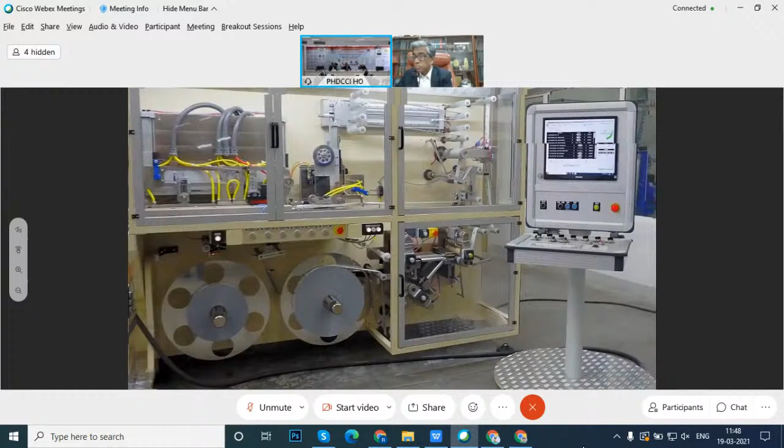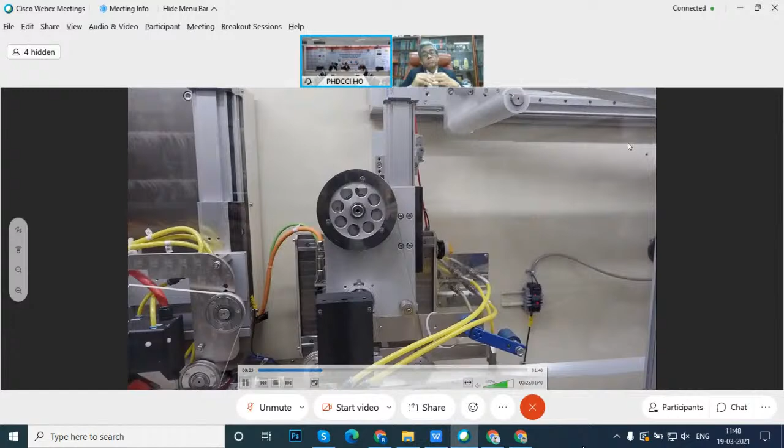Okay, video of the machine, maybe first to show the presentation and then. Put on the presentation also. You want to see the presentation.

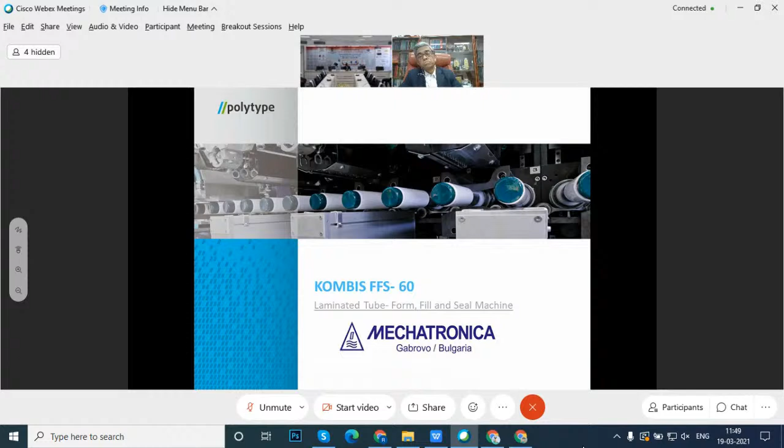Yes, presentation please. First presentation. Okay, good, please work.

So first, just a brief presentation of the companies which I'm presenting. In fact, I'm shareholder and CEO of a company called Mechatronica. Mechatronica is part of a company called Polytype, which is this company. Polytype is a leading equipment manufacturer from Switzerland, as you see in this presentation. They're making equipment for the packaging industry - food, drink, cosmetics, and pharmaceutical - and they have experience for approximately 60 years.

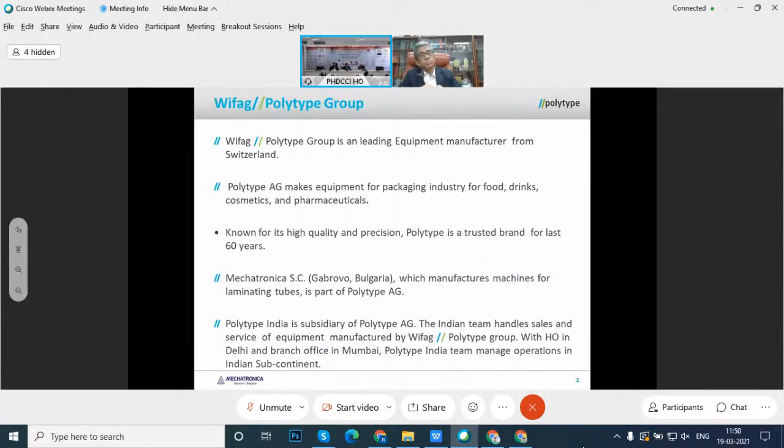Okay, this is a picture of the company and the team working, approximately 80 people working there. The company has a long history, about 60 years, and was always a company for high technology, for new technologies. Many new developments were made through the years.

And to make a machine, we started 23 years ago, but before we had technologies that were part of tube making by conduction, especially, and the knowledge of this technology was already helpful. So this is one of the machines, in fact the first fully developed model, which has already sold around 10 pieces around the world. This is the Kombis trade name, FFS 60. And this machine we are marketing as a machine for short run jobs.

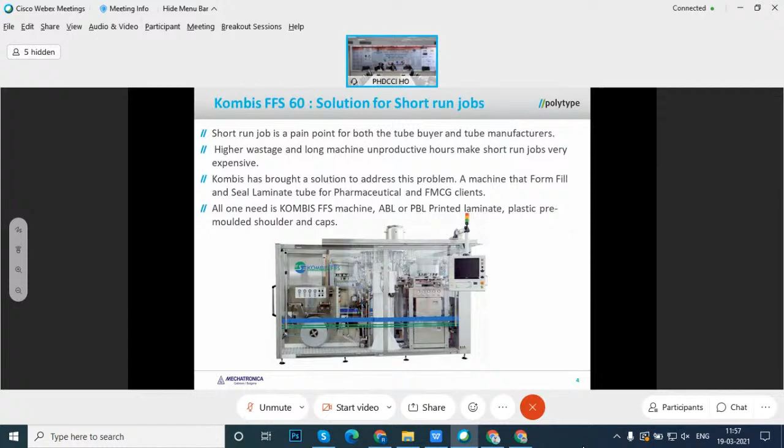First process is to form the body. You take a flat laminate, wrap it around the mandrel, then you do seaming, and then you do cutting. This is the body making - this is the only process which exists in normal production, nothing new here.

Then the next one is putting shoulders. In this technology, we are using a process with so-called pre-molded shoulders. There are two types of technologies for making tubes - you may even say three. One technology is where shoulders come ready-made on injection molding machines, and the tube making machine is just an assembling machine. Another technology is in two versions, but in both, the shoulders are made online - one is with compression molding, which is more efficient in many ways, and another is normal injection molding.

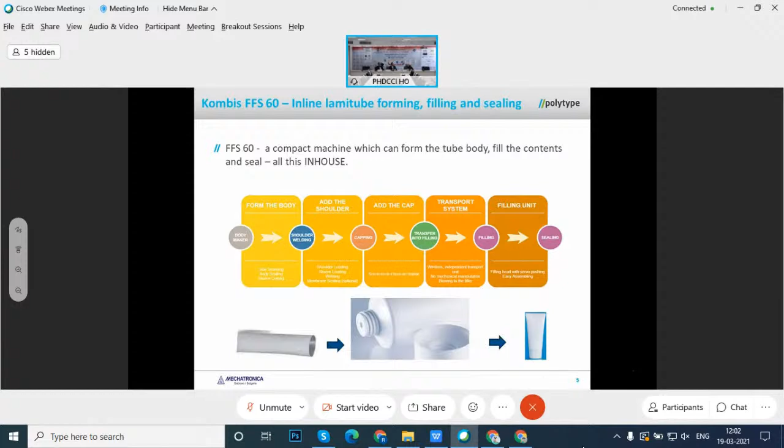Here's the process in more detail, same as what I already said: body making, unwinding, side seaming, sleeve cutting, transfer to heading with pre-molded shoulders, body loading, shoulder welding, tube capping, then transfer to the filling table, filling unit. Then on filling we have orientation, and we may avoid or skip orientation because in most cases we know the position of the tube - here I'm representing FFS 60 machine.

In this machine, in fact, we don't have orientation, but we are also going a little bit higher speed, where we are losing a little bit of orientation. So orientation sometimes is necessary, and you need it because of the physics - you want this face of the tube to be on one side only.

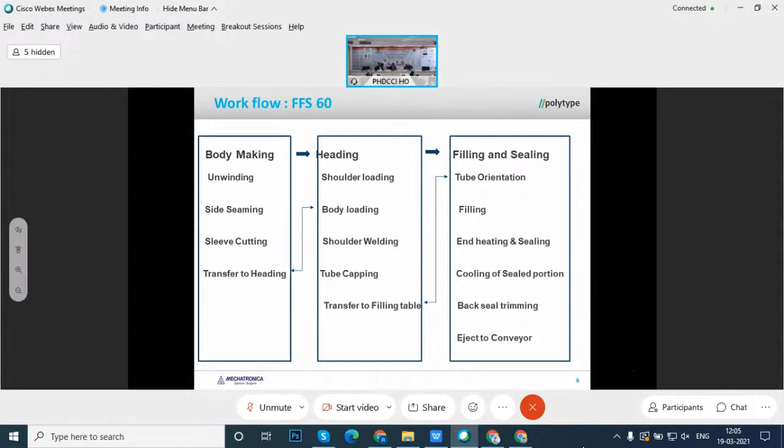Okay, so the next point here is contamination. This is, as I said, extremely critical for the pharmaceutical industry, but also in some other areas it's of course also important.

As you see here, from the time when you start making the tube to the moment when you fill it, it goes through different stages, and also usually two different places when we use standard technology. First the tube is manufactured somewhere, then it's packed usually in cartons. Those cartons can also create some contamination because it's not perfectly clean. Sometimes they are wrapped in polyethylene, but this process takes time, so there is always a risk of some contamination from the cartons.

Then, especially this tubular material, which is a plastic-based material, is very sensitive to static energy, because there is no conductive material inside. In ABL tubes, you have this aluminum layer which distributes these charges somehow, but in plastic especially this is not possible. Therefore in tube making, many times you do static discharging, but you can only do this from outside.

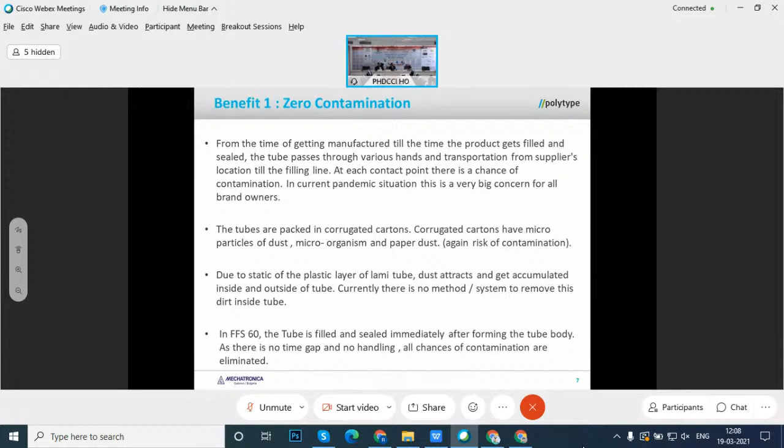Here, this is not a problem because, even though of course there is static charge, filling is done just 2-3 seconds after tube making, and usually the machine is in a clean environment, so there is usually no dust. So this problem does not exist. This is a very, very big advantage, and guys in the pharmaceutical business like this very much. Of course, in other cases it's also good.

Then the next advantage, which is more important here for oral care products, is cost. In the pharmaceutical business, cost is usually not a big issue, and the medicine is usually expensive enough. But in oral care, cost is a big issue. So the main advantage of using FFS technology is in thickness. And why can we use thin material? I told you that the main problem, which we are also solving, is transferability.

If you use thin material, tubes are very soft. And transferring these soft tubes from the tube making machine until they go into the holder on the filling machine is very difficult, and in particular with material below a certain level, it's practically impossible. So on this machine, we can make

very thin tubes. Just to give you an example, our standard laminate thickness at the moment, which is used for ABL, is something like 220 microns, about 1/5 of a millimeter. This machine we were testing with 120. This is almost half of this material, and it works without any problem. So you may save a lot of material. Half of the thickness means half of the cost. Because usually foil is the most expensive component of the tube.

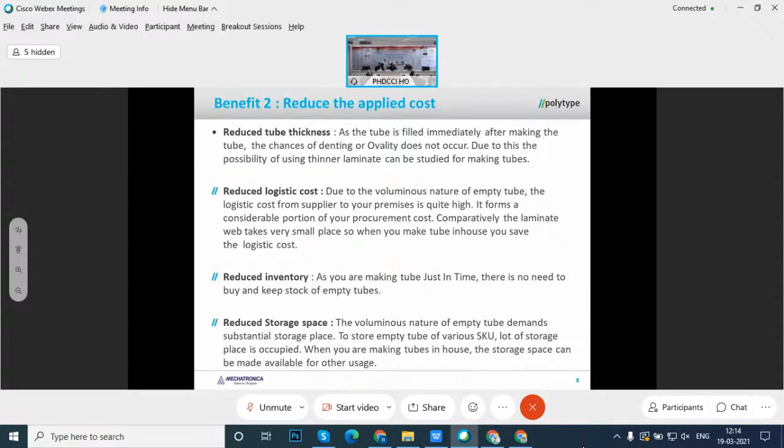Storage space is also very clear, because you don't really need storage, or at least you only need storage for the foil, which by volume is maybe only 1/10 of the volume tubes take. Very easy to store foil.

So this is an advantage which I want to discuss again. Another problem: as I said in the beginning, more and more brand owners are targeting small runs. But to make short runs you still need to produce these tubes, and tube making is a process which requires changing settings. When you start making these tubes, you always have some scrap until you adjust the machine, and then it goes to the filler, and then again you do some adjustment. So during this process, when you do short runs, you always have a certain level of scrap.

Using this, you significantly reduce this scrap because you skip some of the process. Of course, I cannot say there is no scrap at all, but the reduction is quite significant for short run jobs. And lead time in some cases is quite a big problem. When you need to order a small number of tubes for a new product, manufacturers, if they accept your order at all, because most of the time they are not even ready to accept it, put it at the end of the priority list. So they usually make those tubes when they get some time for doing this. It could be a very long time.

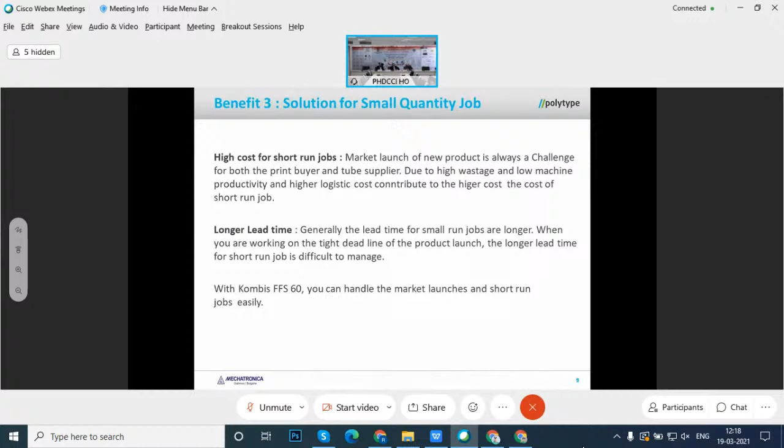So this is a big advantage of the technology in this way. Hopefully, if you can digitally print it, even this is not a must. Okay. And carbon footprint, I already talked about this. The main reason is that you use thin laminate. But also, as I mentioned, you may do a combination of tube and shoulder in one piece, and that also helps to save. Really thin material is something you can run only on this, something like 120 microns. And also during transportation you spend less fuel, so it also helps a little bit to save footprint.

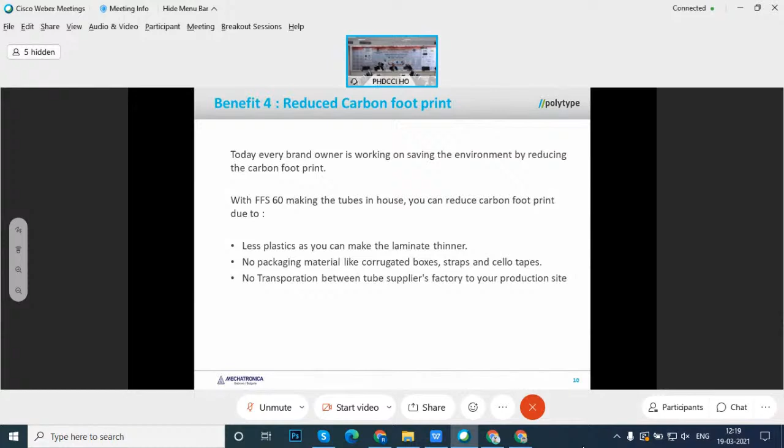Here is just brief data for this machine. For type, as you see, ABL and PBL. For thickness, as I said, ABL 120 to 400. PBL, so far we never did less than 220. I'm not sure it cannot be done, but we never tested because we didn't find such a material so far. Most probably it will be possible. But ABL we tested and it runs very well at 120. Speed for PBL has some difference. This is related to tube making: the difference is because of how you seal the tube. You first heat the plastic and press it, and then you need to cool it down.

When you heat it, if you provide a high thermal gradient, so it means your heating agent, if this is air or maybe induction, you may heat this plastic to 200 degrees. Usually more than 300 is dangerous because there are structural changes in the plastic, but at least you may hit 200 degrees. So if you take from 20, room temperature, to 200, you have a high gradient. So heating transfers relatively fast.

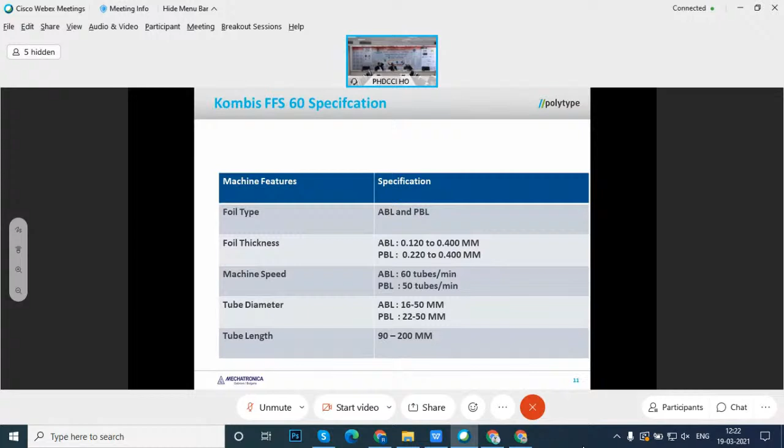Diameter range again is a challenge. We also have one machine that is doing even 10 millimeter tube. But this 10 millimeter tube is not very efficient because it's much more material, like shoulder, cap, whatever, and inside there are 2, 3, 5 milliliters of product. So this tube is more packaging material than product inside. But it could be made. And then length 90 to 200 also could be reduced a bit. And that's it.

Thank you, and we'd like to show the video now. Okay, yes, it's good to see the video because you will get more information about the machine.

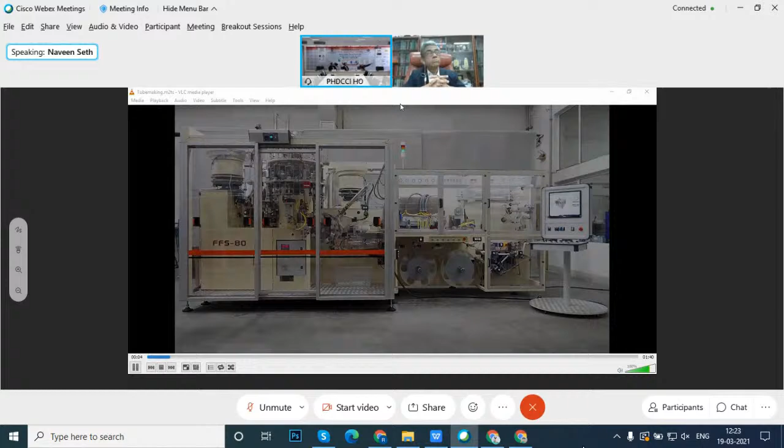This machine which is on the video is for our customer in Japan. It's not FFS 60, it's FFS 80, so this is 80 per minute. This company from the start is using only FFS technology for tube production. And they produce toothpaste, they produce some cream. I don't know whether you can hear, you probably can hear. This video is kind of an initial video.

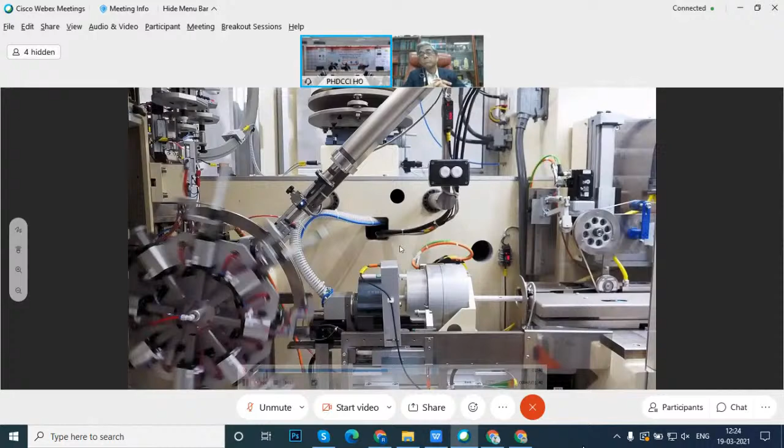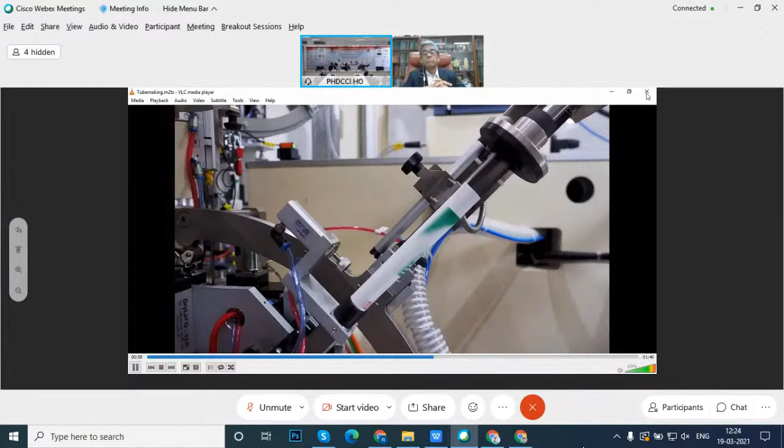So here is body making, cutting of this body, it's a rotary cutter, then it's transferring to the intermediate table, because it also needs orientation. Then it's transferred to the tube making part. Those are shoulders, body shoulders. We wash shoulders before washing the body, then wash the body, then we do sealing of the shoulders, and then caps are coming. In this case, those are conical caps, simple caps. On this table, we also can do orientation of the cap if needed. And this is the capping, and then this is transferring to the filling process.

The filling machine, as I said, is not very much different from standard filling. Most important is really this moment of transfer. As you have seen, the tube is pulled from the mandrel, and immediately the head of the tube goes into the holder before it leaves the mandrel on which it was made. So there is not even a fraction of a second where the tube is free. It's really very important for thin material. If you have thick material, a stable tube, you may use many ways to transfer, but here you cannot. Okay, so thank you. Thank you.

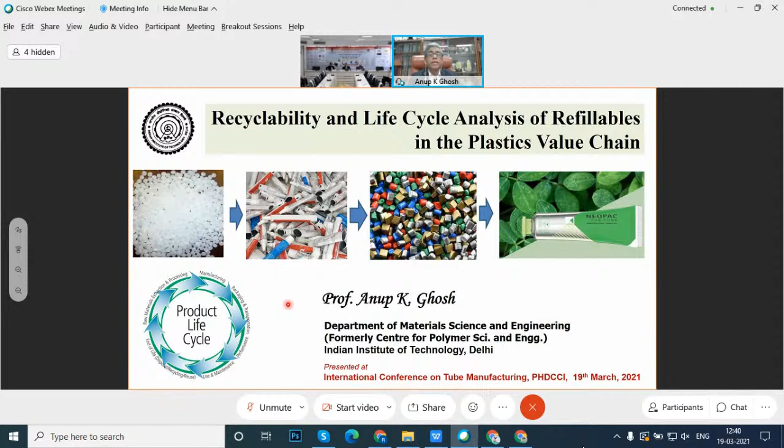Before I go into my presentation, I have to talk about my department at IIT Delhi. It is one of the established centers in polymer science and engineering nationwide, and it is number 1 in the nation and also globally. But very recently, we have broadened all our activities into a new material science and engineering department, which takes care of all different aspects of materials engineering and material sciences, covering polymers, metals, functional materials, nanomaterials and electronic materials.

And we also have a Center of Excellence established under the Ministry of Chemical and Fertilizer, Government of India, under Advanced Polymeric Materials. And by broadening into a new department, as you can see the inaugural program, the students and our director and all of the faculty involved, we also have started new undergraduate and master's programs in materials engineering, which are already taking the top ranking students among all other institutes and other IITs.

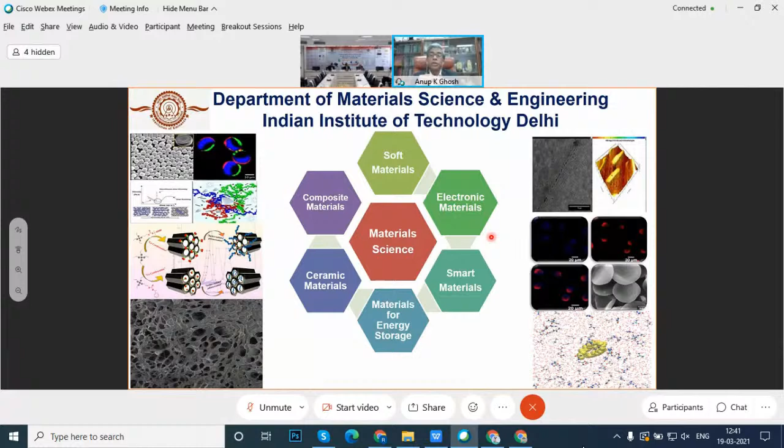What we are covering are all materials starting from, as I said, soft materials, electronic materials, smart materials, materials for energy, ceramic materials, and composite materials, and that covers the total material science. And you can see different structures and properties and processing that we develop. I just wanted to give you a little bit of preview of our department, and then I move on to my talk.

This recycling and the environmental concern is becoming so important, and in every conference, every forum under the United Nations and in India, in many ways we are now talking about sustainability and environmental programs. Very recently, the New Plastics Economy Global Commitment has been made under the Ellen MacArthur Foundation, in collaboration with UN Environment, and they have decided to go for a common vision and targets to address plastic waste and pollution.

A number of signatories worldwide took part in this. As you can see, close to 200 businesses that are part of the plastic packaging value chain, representing 20% of all plastics packaging used globally, have signed up. 16 governments from 5 continents signed up. 26 financial institutions with investors have signed up for this. Leading institutions like the World Economic Forum and consumers have all come together.

And interestingly, more than 50 academics, universities, and other educational research organizations, which include the MIT Environmental Solutions Initiative, Michigan State University, University College London, have all come together to address many issues of concern whenever we are talking about tube manufacturing and other packaging manufacturing.

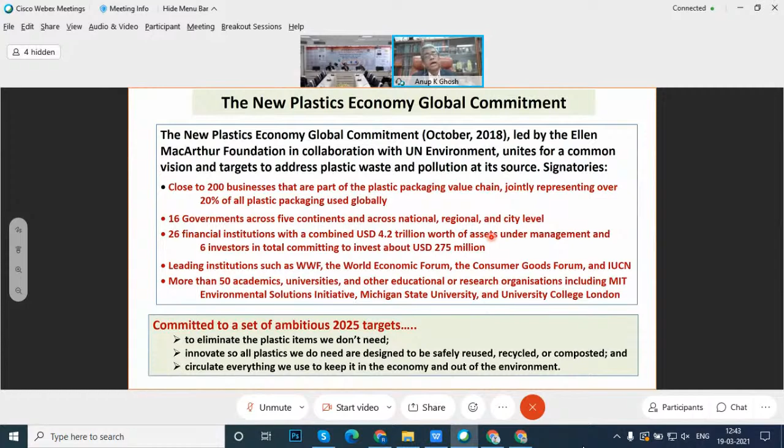We need to look into this, and they have set ambitious 2025 targets: that we eliminate plastic items we do not need, or we innovate. All plastics that we need are designed for reuse, recycling, or compostability. And we circulate everything we use to keep it in our economy and out of the environment. So we have to now go for a circular economy, and we have to circulate.

With this, my background presentation is where we can think of circular economy solutions with the scope of recycling methods across the plastic value chain for any packaging, whether it's a tube, flexible packaging, or a container. And leakage of plastic waste to the environment is the least desirable.

So how do we analyze that? Mostly we need to make a hierarchy of plastic waste management. We need to categorize all products as single-family or multi-family material, and that has to be done based on the extent of recyclability.

We need to understand that everything cannot be recyclable, and whatever is recyclable also has a degree of recyclability, and this degree of recyclability depends on the material, and also how many layers and how they are laminated. Is it laminated with a single-family material or a multi-family material? And you have to quantify how difficult it is to recycle by mechanical and energy impact. That's what we are doing with life cycle analysis, and that's what I have mentioned.

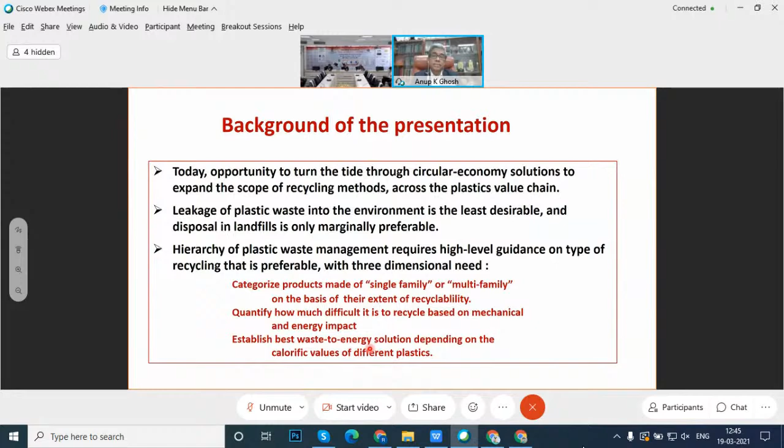And we need to establish the best waste-to-energy solution depending on the calorific value of the different plastics or materials that we are using. So, no need to say that plastic recycling is the need of the hour for sustainable development. By 2050, we will need 35% more food, 50% more energy, and 40% more water.

How do we manage that? When we try to manage that, what kind of material is required? That's why we say waste management and materials management have to be connected in order to solve it. We cannot be biased. We cannot just eliminate one for the other. We need to evaluate; every material has its place.

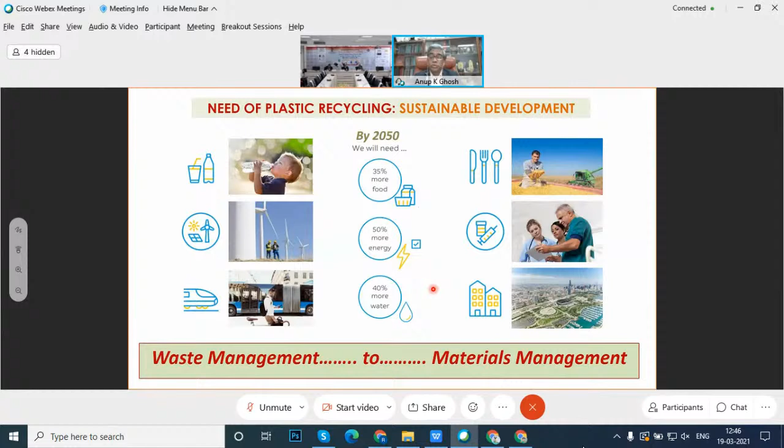This is not only waste management; we have to do resource management and material management, and how much from the waste we can bring back to the actual virgin material, or as a replacement of virgin material, is becoming the challenge, and that is the United Nations directive that we have to follow. And what are the benefits of that? Let's have a look at it.

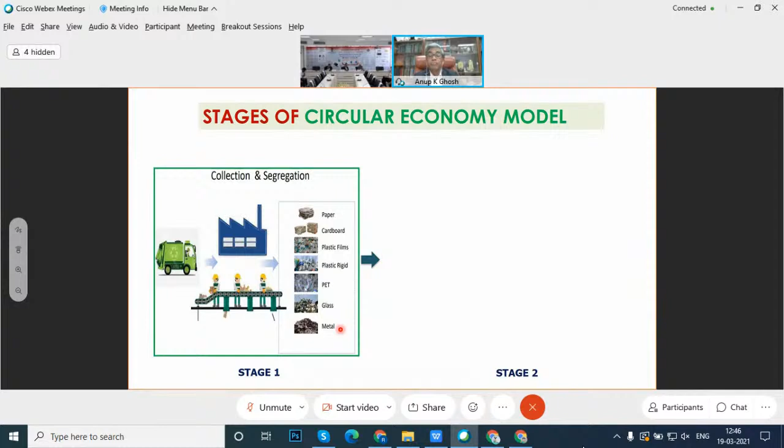So for the circular economy we have two stages. First stage, we have collection and segregation, and when we segregate, we have all different kinds of material: metal, glass, polyester, rigid plastic, plastic films, cardboard, paper, etc. We need to segregate, and then we have a value chain. There can be a rigid plastic value chain, there can be a flexible plastic value chain,

and that has to be connected together so that finally we reach a product, in what we call a cradle-to-cradle system. I've written that collection and segregation is a challenge: how do we segregate this material, grind it, and get plastic granules. This is where we have to reach. We have to do a lot of research and a lot of technology development.

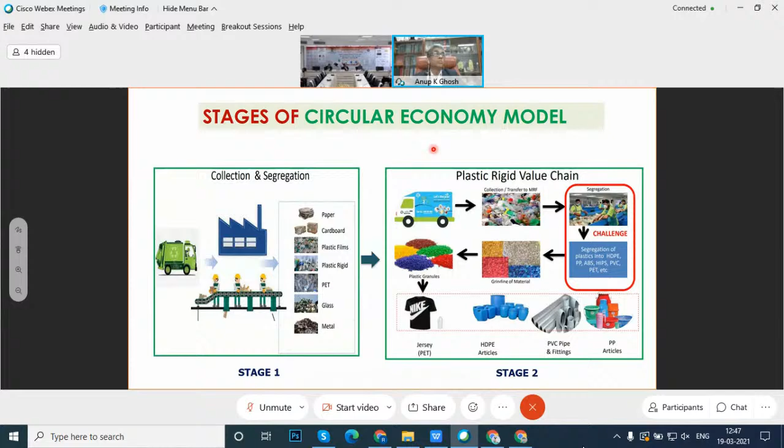Not only do we have to develop packaging products, we have to see that after use these packages can lead to very valuable plastic granules, called post-consumer resins, which can be converted back into the actual product or go back as a replacement of virgin material. If we can do that, we'll have the successful circular economy model that we want. I will go very quickly with this.

Where is the problem? Smaller plastic is a big problem. We are talking about the lamy tube here. The caps will be a problem. The container caps are a problem. Smaller items are now being considered single-use plastic products, which has come as a United Nations regulation. Our country is now putting that regulation in place. Within a few months, early next year, this will be in place. We have to look into it.

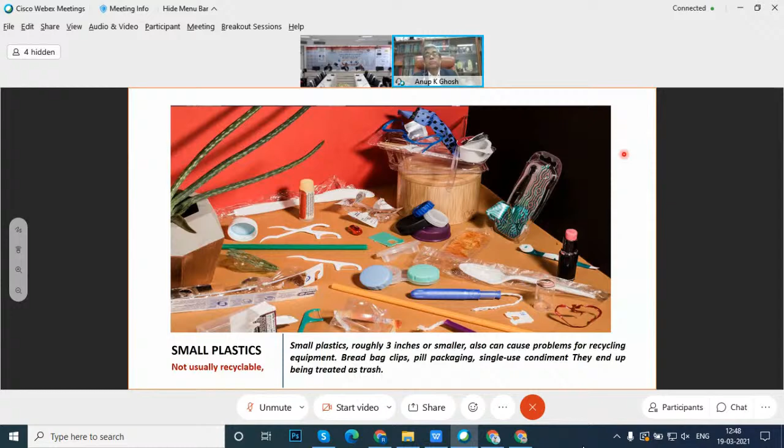If it goes to flexible packaging, it's recyclable, but proper collection, sorting, and processing are needed. And if it is multi-layer, then it's a big problem, and we have to see that. Many packages have different layers, with plastics as well as non-plastics, as in the lami tube. Also, because of the barrier properties, we are bringing in other materials or liners with aluminum or other materials.

Until and unless there is a separation of layers, we will not be able to capture this, what I can say, that PCR. So we have to look into that.

Bags, as we know, are a problem, but it is micron thickness dependent. I will show you how, from micron thickness dependency, we can add value to the environmental concern by bringing back this material if we are using our technology properly. Obviously, it requires proper collection and sorting, and then they can be recycled back, and there are lots of recyclers actually working to put it back.

Even the beverage bottle or the tubes are recyclable, but we have to be sure to remove which products are removable, or which other materials need to be separated even among plastic material, so that the container is removed away with the labels, and recyclable or non-recyclable materials are separately brought in. So some areas of segregation become very, very important, and we have to make a lot of effort in this area.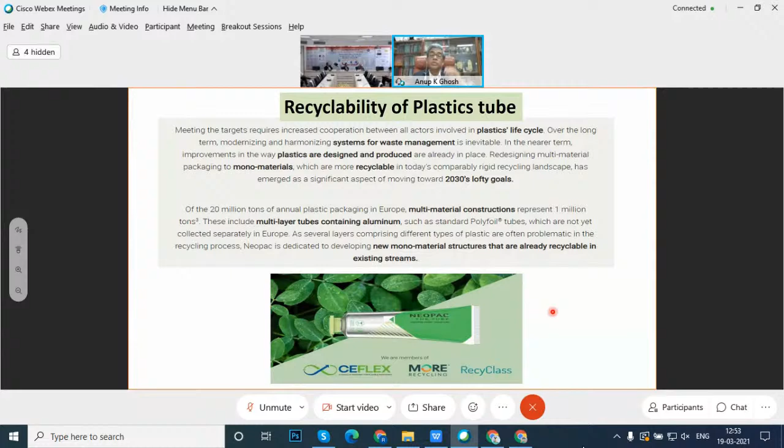So we have multi-material plastic tubes always. In Europe, 20 million tons of annual plastic packaging is happening, maybe even more, because the statistics are changing. Out of these, 1 million tons are multi-material combinations, so you can see that about 5% is a multi-material combination, which cannot be recycled easily. The recycling is also difficult when there are different types of plastics, as well as non-plastic material present.

So can we take care of that 5% of foreign materials, so that the recycling process is not disrupted? We have to redesign the material with the solution of monomaterials, which I was saying. Many companies, I'll show you some, are actually looking for the solution, and everybody is coming up with a new solution.

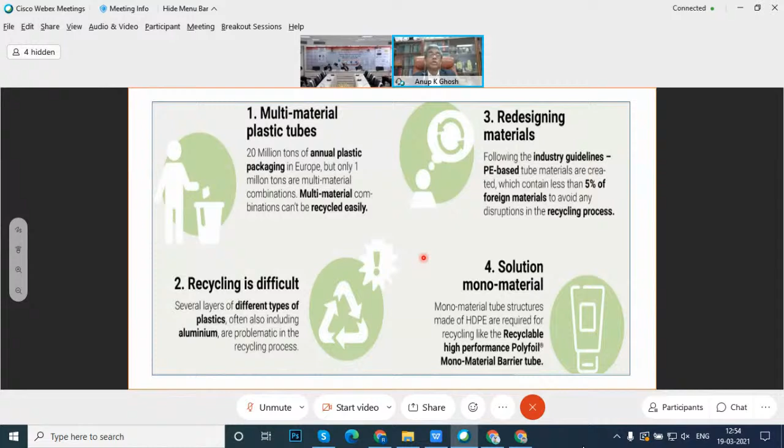So what is the waste hierarchy? We have from most preferable to least preferable. We do not want disposal. We do not want our packaging material, laminate tubes and flexible tubes and all that to go into disposal, because it will harm the environment, and we are also losing the value.

If we go up to the most preferable way in the waste hierarchy, we would like to see energy recovery, recycling, and reuse. The reuse concept should come in this waste hierarchy, and that can determine the recyclability. We should go for reduction wherever needed.

My previous speaker also mentioned that they always started avoiding extra paper carton and other extra packaging. Why should we go for extra packaging? Why does toothpaste have to be put into another rectangular or square cross-section paper box? Why can't it go only as a tube into the market? There should be prevention of using such material. As we move upwards, we are actually reducing the waste as much as possible.

So the recyclability has to be defined. Recyclability is defined in such a way that plastic should be made so that it can be collected. It should have visibility, collectability, and value in it for collectivity. If it doesn't have value, it is not collected. Anything is not collected if it doesn't have a value, and this collectability defines the recyclability.

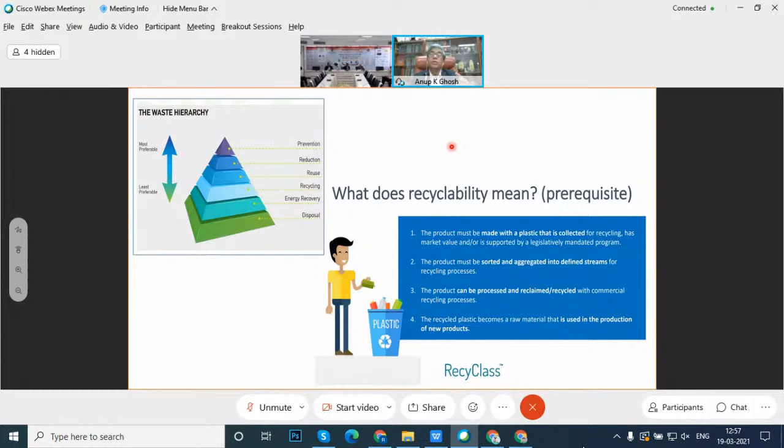This is a RecyClass, defined by France, which has now been considered by many as the prerequisite for recyclability, and there is a ranking of recycling being done. What kind of recyclability platform have they suggested?

For recyclability, there is an evaluation protocol. We cannot just say this is recyclable - how much is the recyclability? There should be a test on the recycled product with and without innovation. So when we do some innovation, we have to compare the properties. Then the technology has to get approval, so this evaluation protocol has to be approved.

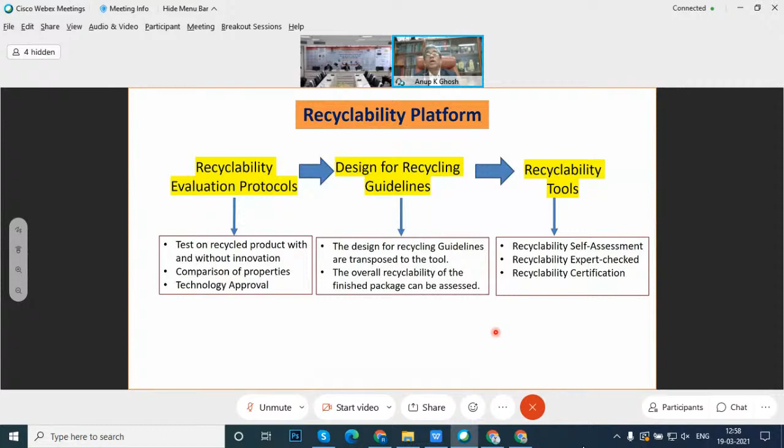This will lead to design-for-recycling guidelines, which should be transposed to the tool, and the overall recyclability of the finished package has to be assessed. For this purpose, the recyclability tools used are the recyclability self-assessment, recyclability expert-checked, and there should be a certification of recyclability. This is the platform being developed now worldwide and is being taken up by the UN.

Because of that, we have taken up different polymers, their pigments, the material used for the barrier, the material used for the label, and we looked into the adhesive. So one particular packaging has so many different components added to it. So what has been done?

The recyclability ranking has been done in many different ways. This is one of the ways - if you go from one column to the other, you will see that we move from yes to conditional to no variety. Yes means full compatibility for recycling - the material used, the color used, the label used should be a PE system or poly system. If it is different, then the recyclability becomes different.

So you can see I've also given a color code from green to red. As you move from green to red, you are actually moving into a zone where the recyclability becomes meaningless - it will not have any value. When you come to the middle column, it's limited compatibility for recycling - they pass the testing protocol only if certain conditions are met.

So you have to work with recycling with a lot of technological input, because it has a multi-layer system. It has some translucent color system. It is a different level. It may be of PP, it may be of paper, but still they are from the same family, so there is a limited compatibility. This is acceptable.

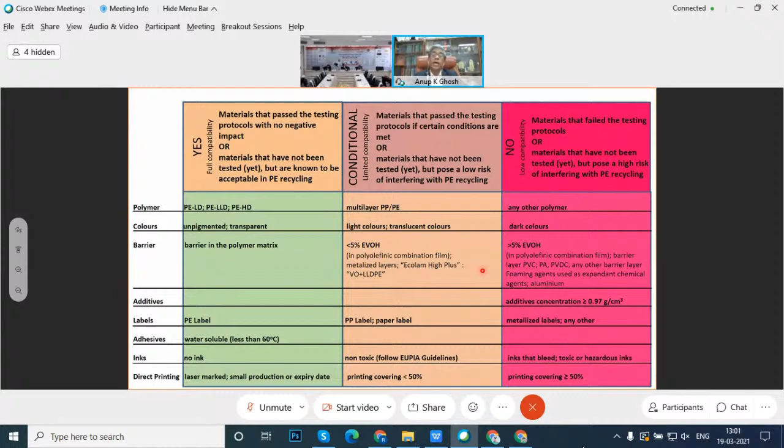The steps are very huge. You can see that we have commercial waste which is segregated. Then we have something called incinerable solid waste, then non-incinerable solid waste. We are actually trying to work more on this for composting, etc.

When we say incinerable, then also you can say whether it's a recyclable plastic, and from there whether we're going for waste to oil, road construction, or recycling. If it is non-recyclable, they will go for different energy recovery options, co-processing in cement kiln, or plasma pyrolysis. So it has been shown based on the different variety of material.

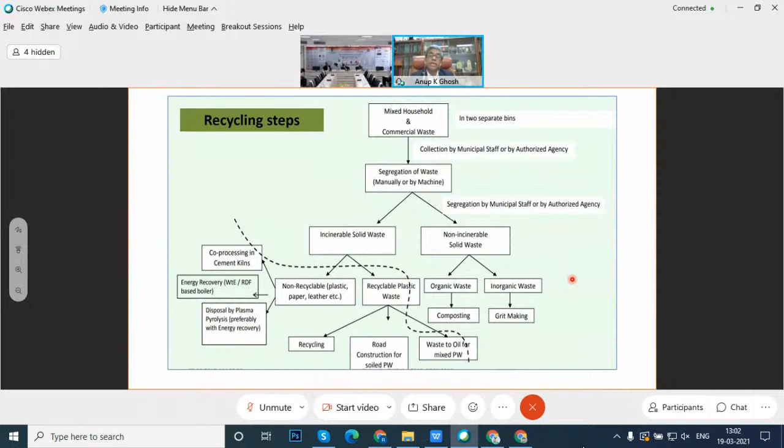It has also been shown as different recycling systems that have a degree of recycling in this case. What it leads to, as I said, is that we have to move into recycling into post-consumer resin, and that has to have some value. We should be able to go back to our original granule or replacement as a virgin granule. If we can do that, that is the most success story we like to reach.

So from these we like to go to original resin possibility, and then they will go back as a feed system as a replacement of the virgin material, or the mixed product will give a recycled material which will be granulated, and then go for different value-added products by molding and other processes, pipe making, furniture making and other processes, which in today's socio-economy have less value, but we have more value addition if we can go for the PCR product.

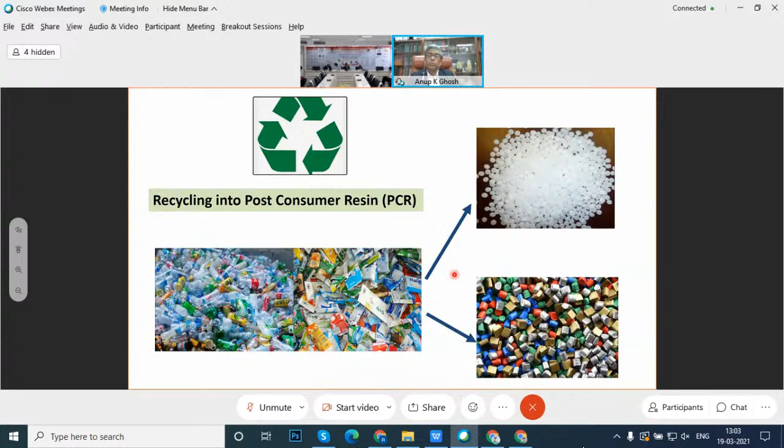I like to bring in some example which has been done. Essel Propack has launched new recyclable HDPE barrier tubes. There is a lot of work from Essel Propack, and a number of patents have been developed. I'm showing you one or two of these developed works.

I wish Mr. M.K. Banerjee, who has been involved in a number of developments of a number of products, could have given some talks here, but unfortunately he could not be here.

So they have made mainly a pharma formulation, and they made a product in such a way, because you have a body and you have this neck part of the product, and they made it in such a way to control the loss of aroma, because some pharmaceutical products within a few days are losing their aroma. Based on HDPE, they have developed a good chemical barrier, but because it has limited moisture and oxygen barrier, they have gone with different coating.

But aluminum foil reacts with the formulation, so it is not only bad for recycling, it is also bad for the product, and delamination occurs and all that. So they have worked collaboratively with a company, with Kuraray from Japan, and they developed an innovative binder-based TiO2 nanocomposite product for the tube shoulder, which makes a huge value addition and recyclability, based on the huge market value, which must be going into commercialization and being put in place.

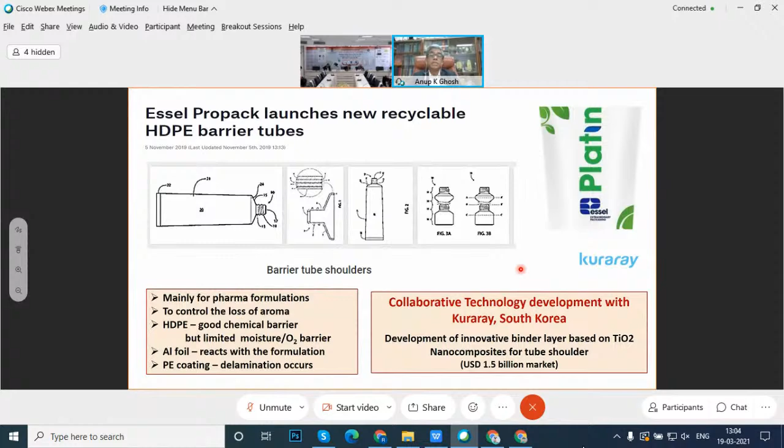They have also developed many products in this. It is called Platina 250, Green GML 300 Lamitubes, as you can see, and different brands of Essel Propack products are also going. It is not only Essel Propack, there are many others.

Procter & Gamble is also coming up with new packaging material for their toothpaste brand, and they feature recyclable high density polyethylene toothpaste tubes. They have most probably already started production of the recyclable toothpaste tube, and they will go into full conversion of their product by 2025. So you can see the commitment and dedication that the companies are taking into developing or redesigning material for the tube, which will also address the environmental concern of recyclability.

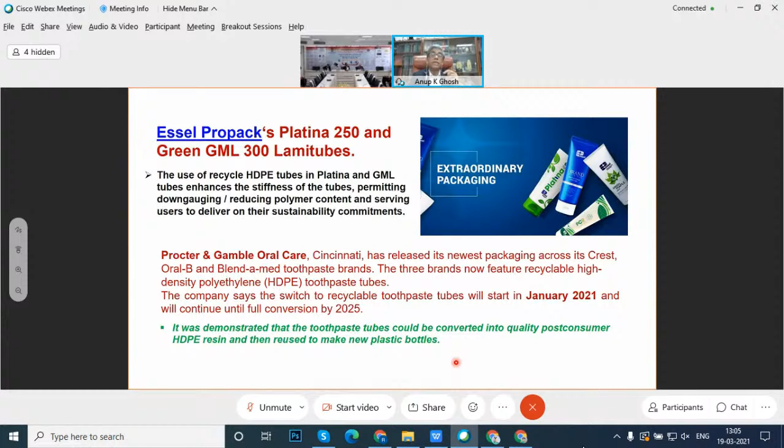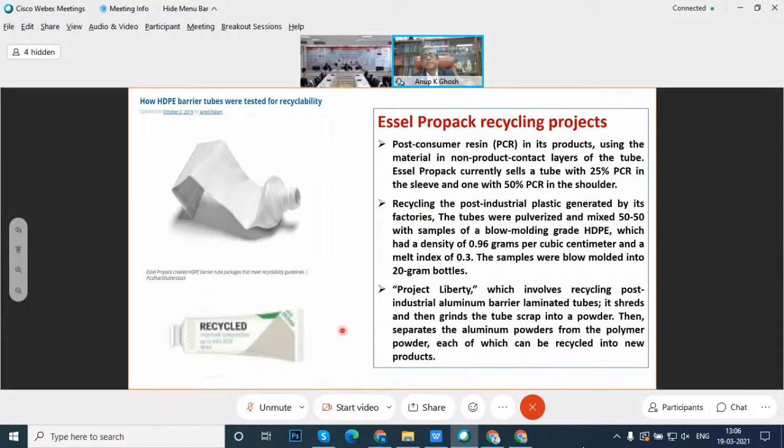I already said it, but I'd like to mention here that Essel Propack is currently selling tubes with 25% PCR in the sleeve and 50% PCR on the shoulder, which is a lot of value addition. And with that HDPE and that mixed sample, they maintain a melt index of 0.3, which can be blow molded into 20-gram bottles and other products. So there are a number of projects going on in the recyclability of HDPE barrier tubes. I talked to Mr. Banerjee, and I got a lot of information about how Essel Propack was doing all this.

The other success story is with the fillables. I don't know whether this will work, but the industry has started working on it. This milk vending machine, the milk ATM, like Mother Dairy and others, where you go with your own can and collect your milk and other products, has become a very successful story. Personally, I would like to see a lot more fillable situations being developed for many products. Instead of unnecessarily using a lot of packaged product and throwing it away, we can go for reduction by this process.

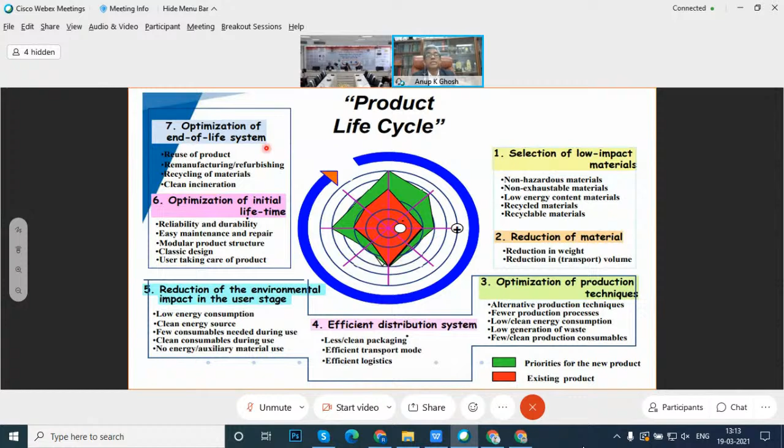Some refillable products, if you have looked into them, are now being made as a modular product structure, so that the body may remain the same while the cap and other parts can be replaced, so the whole package does not have to be thrown away. So it needs a very classic design and the user taking care of the product. And in order to optimize the end of life, we cannot say cradle to grave. We like to talk about cradle to cradle. So we should go for remanufacturing or refurbishing, recycling and cleaner incineration, so that we reduce the environmental burden.

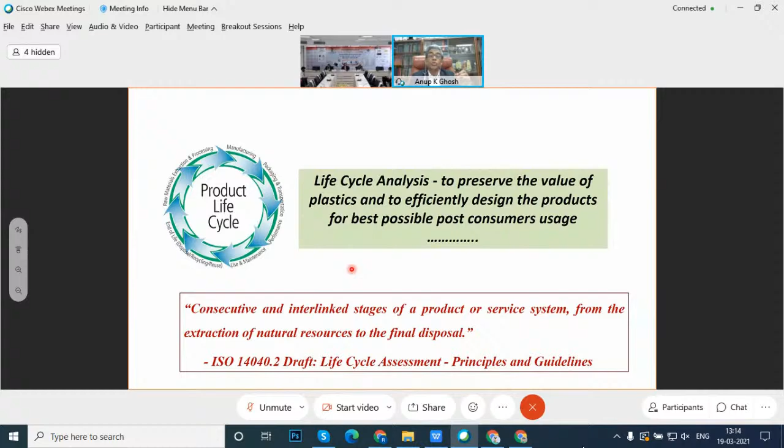In order to do that, we look into what is called a life cycle assessment as per ISO 14040, which has been drafted as consecutive and interlinked stages of a product or service. So all of them are connected. When you're using a product, you have to see the value addition, starting from the raw material coming from the extraction of natural resources to the final disposal. We have to connect it. And that's what life cycle analysis is, to preserve the value of plastics and to efficiently design the product for the best possible post-consumer uses. That is what ISO 14040 demands.

So how do we take care of this? For every product we develop, whether it's a tube, flexible packaging, or a refillable, we look into the 4 stages: production of raw material, manufacturing, use, and waste management. And this can be done across materials, whether it's plastic, metal, glass, ceramic, or paper. Then we look at how much is the material input, the water input, and the energy input, and what is the emission and health hazard.

Or it has a better eco-efficiency, that is economics and ecology together. How we can also use it in communication, how we are reporting it, how we are making environmental declarations, what kind of labels we are putting into that.

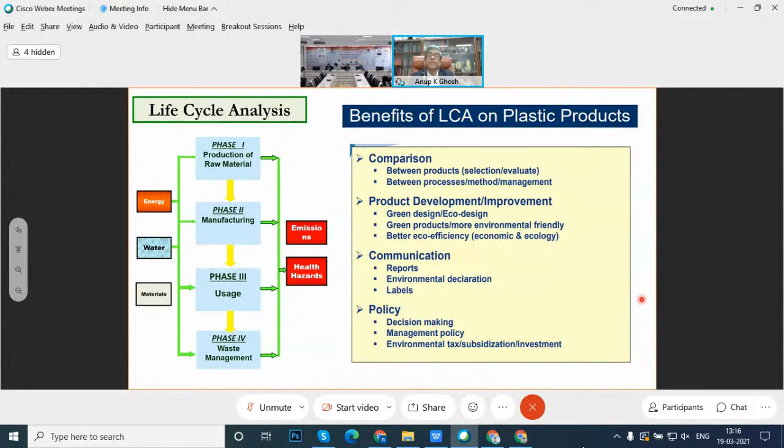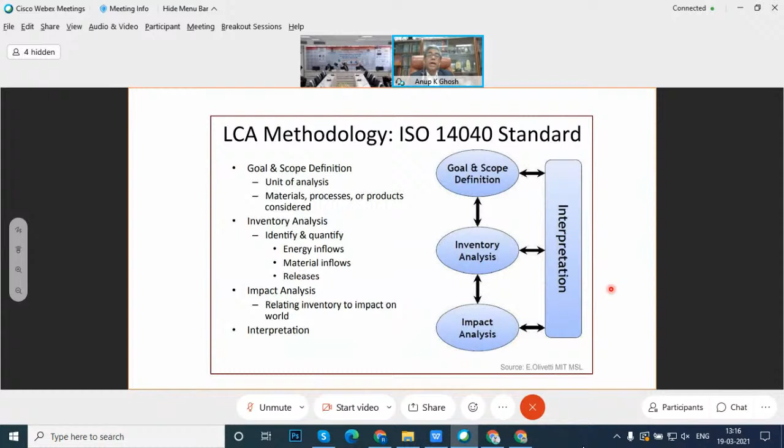As I said, it involves a number of steps. You have to define the goal and scope. I'll give you some examples. It has to have an inventory analysis, and it's not very easy. It's an impact analysis. Very quickly, I will not go deep into it, but I will give you some idea how it goes. The goal means the product to be studied. It has to be identified what is the purpose of the study.

The Lamitube has to be studied. What is its intended application? To whom do the results have to be communicated? What is the functional unit? How many Lamitubes are being used? It has been talked about that 500 Lamy tubes are used for men, 500 Lamy tubes for different products are used for women. And then if you collect together per month, per year, what is the total amount of Lamy tubes that are being used?

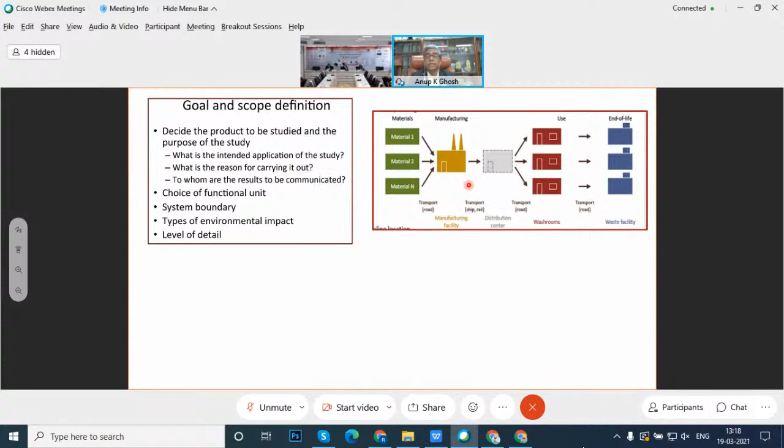And this transport takes a huge amount of energy. It is not the material. Material may be very eco-friendly, but how it has been produced, where it has been packed and where it has been consumed determines it, and that life cycle analysis has to be done.

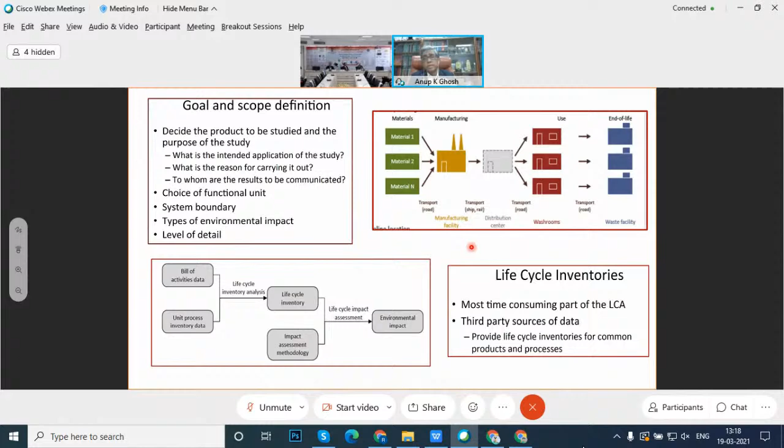And many a time we have to depend on third party sources of data. Many of the companies are not ready to give so much data. So much data is involved, and in a number of life cycle analyses we have done for recycling of material, we depended on many of the large companies who are involved in making the packaging product and labeling it, and then use it for the filling of that packaging and send it to the retailers. But generally it is very difficult to get some of the data which has to be collected.

So once you do that, with the inputs and outputs I explained to you, you can assess this life cycle in terms of many of them. Global warming potential is one of them. We generally talk about GWP, global warming potential. You can talk about acidification in the atmosphere, ozone depletion, human toxicity, photochemical ozone, ecotoxicity, landfill volume. Everything can be considered, and lots of data is needed, and then it should be weighed and interpreted in terms of carbon footprints, greenhouse gas emission, and recyclability, which is very important.

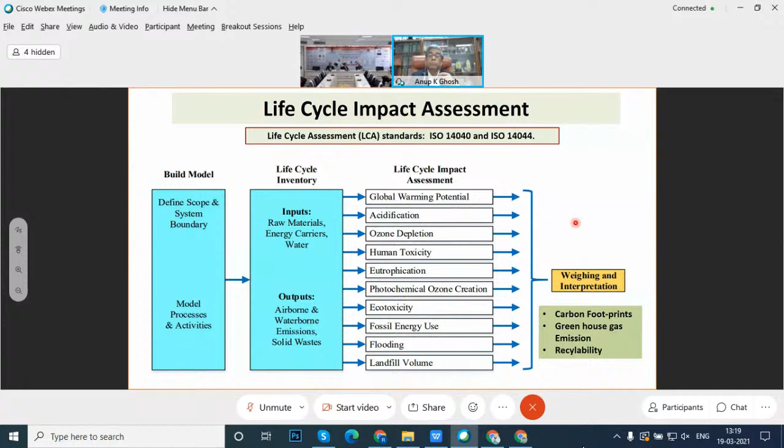If we look at the net carbon emission and net energy management, for landfill, for combustion and recycling, you can see that if you can do better recycling, you have a net negative carbon emission, which adds value to the system, and even combustion gives a positive net carbon emission, which is a concern. Similarly, the total energy consumption also can be evaluated.

These are data for a particular system, which has been done by the US EPA and given these values, which are actually used for assessing the different plastic products, whether they will go for recycling or combustion. What I was trying to say is that more recyclability in a packaging product will give a net negative carbon emission, which is good for us.

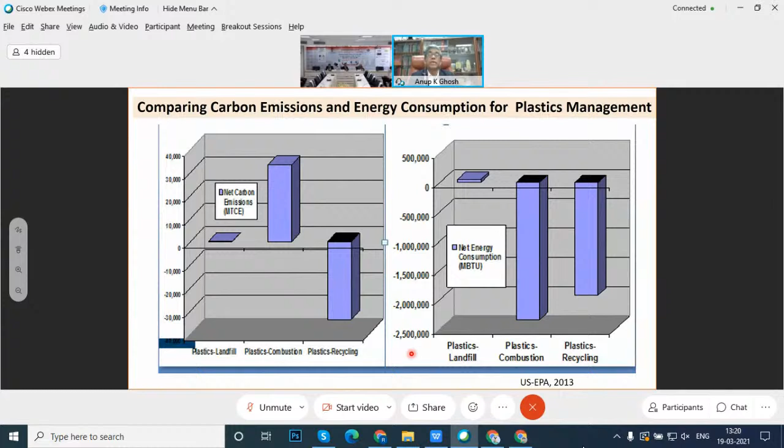And that is, I believe, why some of the Lamy tubes that I've shown by Essel Propack or Procter & Gamble, all these, Colgate that they're using, they're actually working on this scenario. And even the LCA has been done for the glass bottle versus PET bottle.

And you can see that for glass bottle, transport, raw material, product, filling station, to customer, to landfill, all of them are sequentially considered, as has been considered for PET bottle on similar lines. This is data which has been done in Turkey.

They have done a thorough analysis, and based on the life cycle analysis, they say what is the effect on human health, what is the effect on ecosystem quality, and what is the effect on resources, by the LCA of the glass bottle versus the PET bottle, and one can compare. This can be used for selection of material and for policy making.

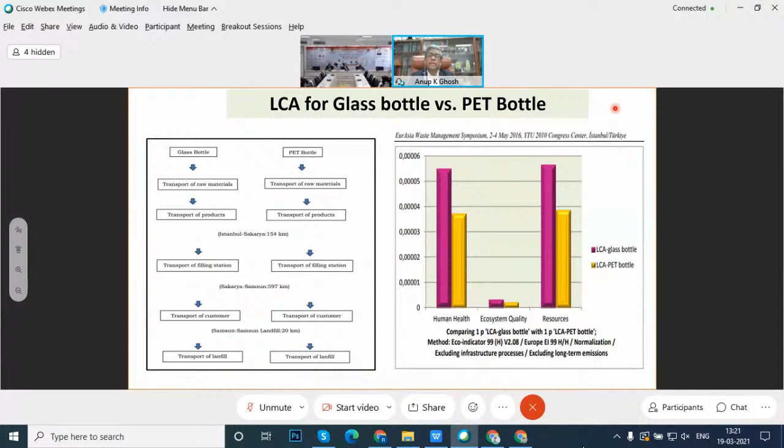And before we take any recommendation or decision, we must understand this kind of data for every packaging material and every packaging design and innovation that we are doing. I will very quickly talk about one of the recently studied life cycle analyses based on thickness.

So we have taken some packaging of polyethylene, which is of 35, 50, and 100 micron. As you can see, this is also a concern in the new regulation that is coming with the single-use plastic situation. I told you that you have to decide the functional unit. So we talk about 1 million bags of these different thicknesses, and then if it is recycled, what the life cycle analysis data says.

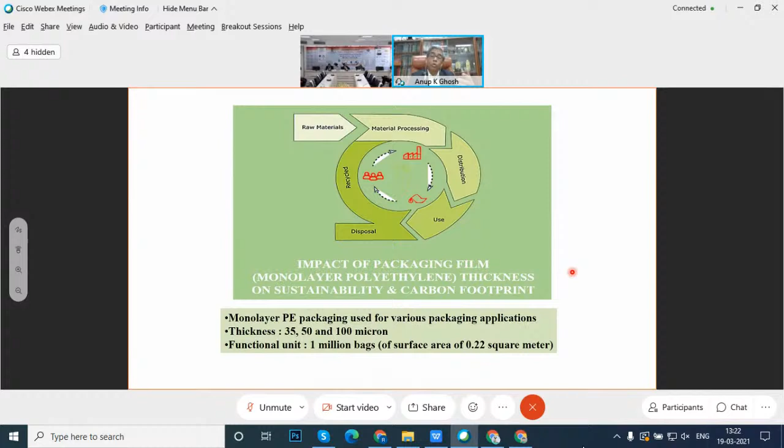So we have gone from granules to the film to the bag to the waste to recycling, and then finally get back into PCR granules, post-consumer recycled, which can be moved back into the granules as and when needed. And we call it a cradle-to-cradle system. So you can see that the life cycle analysis module consists of 3 different stages.

First is crude. From crude to product, we do not generally look into it. We look into the lamy tube. But the lamy tube has come from HDPE, LDPE, and other granules, other polymer products which have been formed. And this is the first part of the module. In the first part also material, energy, and emission are involved.

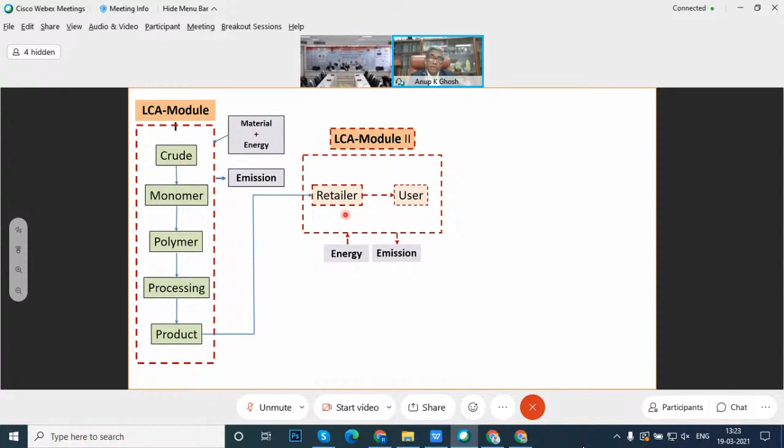In module 2, when it goes to the retailer, to the user, while we are using it, there is also energy and emission involved, because this has to be transported, shelved, collected, and then used. And then we go to module 3, which is very important, where the post-use waste is, whether it goes to landfill, collection, sorting, reprocessing, and product.

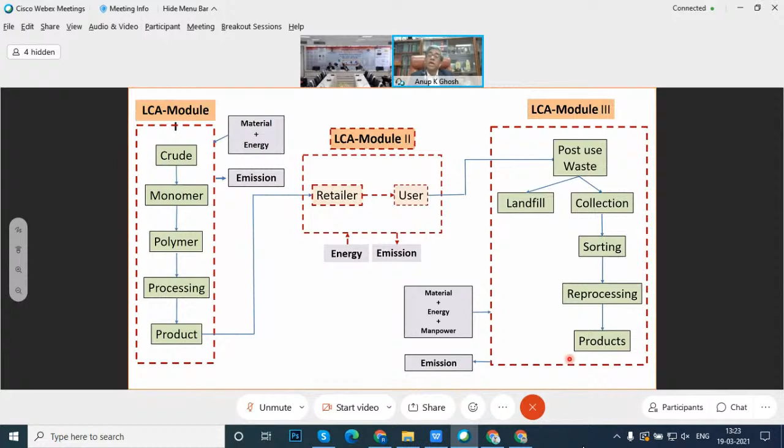For each and every block you can see, we have done the material, energy, and manpower requirement and the emission that will be coming in. You'll find that module 1 we can do with standard data and analysis. The first module is now becoming very standard data analysis. Module 2 is critical data to consider.

Where are these granules going to go and make a packaging product? How far do they have to travel? What is the transportation mode and what is the transportation route, and how is it coming to the user? And module 3 is crucial to incorporate, even as per the standard LCA method. The data for this is still yet to come in a very organized manner.

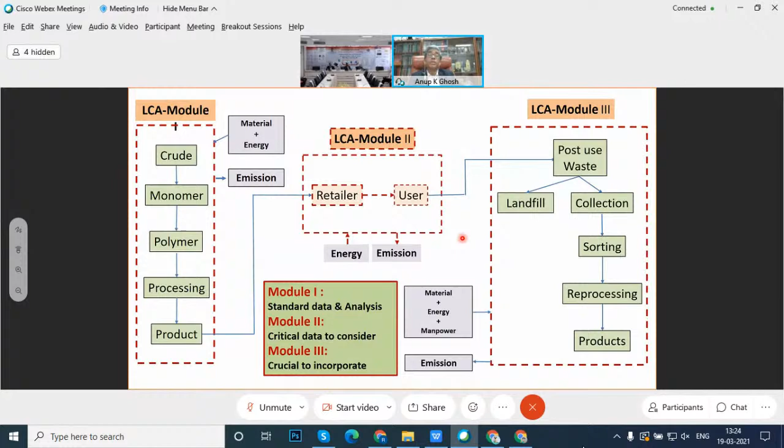This is quite an unorganized sector, and the LCA module depends on this. So where the lami tubes are going after use, how they are being collected, how they are being sorted, has to be looked into. I will not describe what I have discussed in the previous slide. You can see that module 1, module 2, module 3, each and every aspect has been done with the software.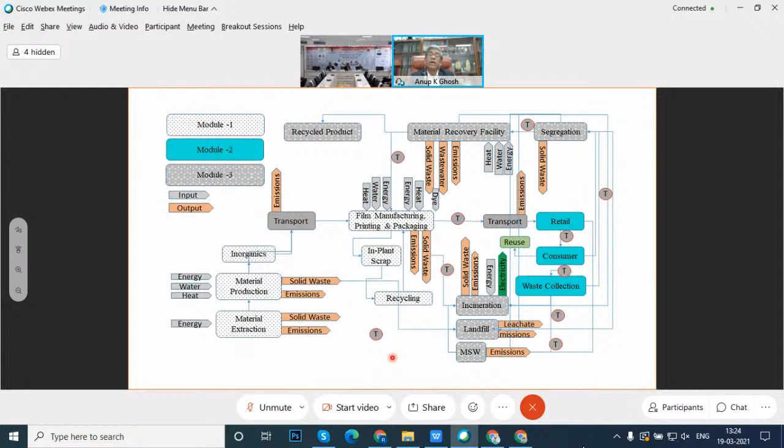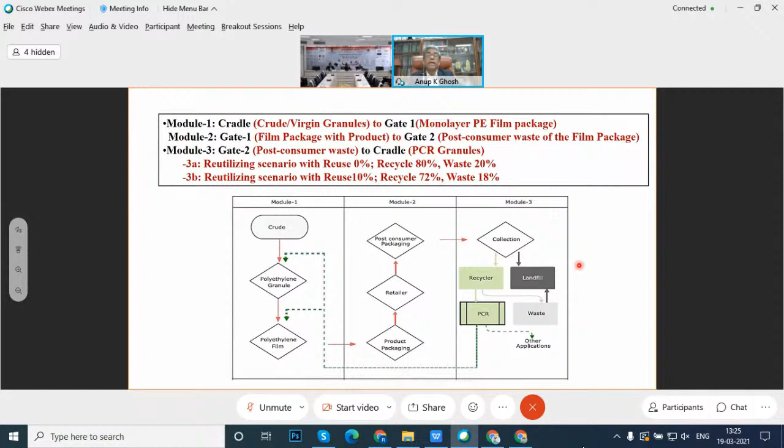But what I want to talk about is, we looked into it with 2 scenarios, cradle to cradle, you can see that, okay? And we thought, if we use 80% recycle, if we use 72% recycle, what happens to the system? So each case has been analyzed in terms of different impact categories.

Okay, so as I said, global warming potential has been looked into in terms of CO2 emission, carbon monoxide emission, methane emission; acidification potential, which has SO2, NOx, and HCl, which gives the acidity value; and the eutrophication potential with phosphate and ammonia has to be calculated. And then there is a factor given.

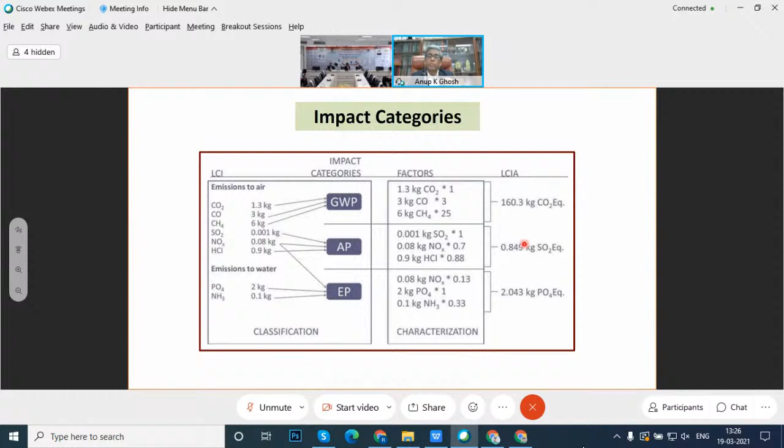We say there is a carbon dioxide emission. We talk about carbon footprint. What are the factors? What equivalent makes one equivalent of CO2 emission? How many kgs of CO2, how many kgs of SO2, and how many kgs of phosphate are developed. That has been put together. It has been seen that by changing from 35 micron to 50 micron thickness, our GWP is increased by 72%.

And it increased to more than 300% if you go to 100 micron. So just saying that 100 micron is better, we have to look into that. But we may have to do that because of the collectability, sorting, and ease of waste management. I understand that. Okay, so the magnitude of carbon footprint remains around 77 to 90%, until and unless there is a possibility of recycling efficiency improvement.

We went back and we put 25% of the recyclate back in as a virgin material replacement, which is becoming the norm, that by 2023 we should have 20 to 25% PCR back into the making of the bottle, making of the container, making of the lami tube, and that is as a replacement of the virgin material.

And you can see that by bringing 25%, we are reducing global warming potential by 28% and 137% for 50 micron and 100 micron. So if we have to use 100 micron, we must think of this PCR coming back, and that is reducing 137%. And if we can increase this 25% to 50%, most probably we'll be able to very closely offset this 300% increase in environmental load, and we may offset it by reducing it to maybe 250%.

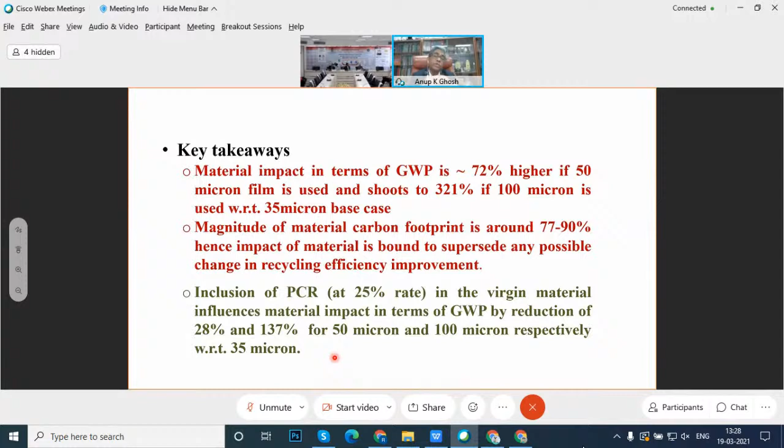So we have to look into this and we have to balance, and this should give a policy document, a policy suggestion, why we should go for 50 and why we should go to 100 and why we should be going above 100, until and unless we have proper recycling back and replacement of the virgin material. Just increasing the thickness, I don't believe gives a proper solution for this.

So I make a kind of a seesaw balance for this purpose. And if you look at it, this is the material impact, the heavier one, which is pushing it back. Go to 100 micron, you'll push it back. But if you increase the recyclability, most probably finally you'll be able to balance it. And if we can balance it, we should go towards this lower carbon footprint if we can put this thing down. And that's what I have shown, that the PCR is coming back.

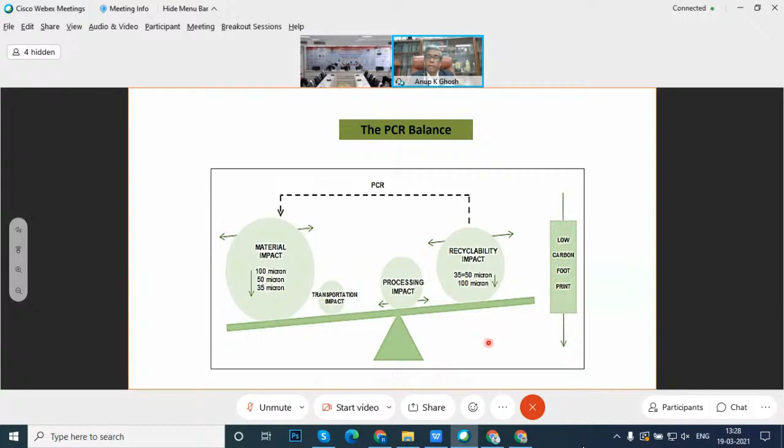So what is the recommendation? Recommendation is that the thickness impact, lower to higher, could make a net negative for the environment in terms of the carbon footprint. And as I already said, I need not read all this. As you know, UNDP by 2030 is asking for 75% virgin feed to be replaced by PCR. And I think all lami tube manufacturers, all refillables, all other packaging material, they must be working for it. We have to work together.

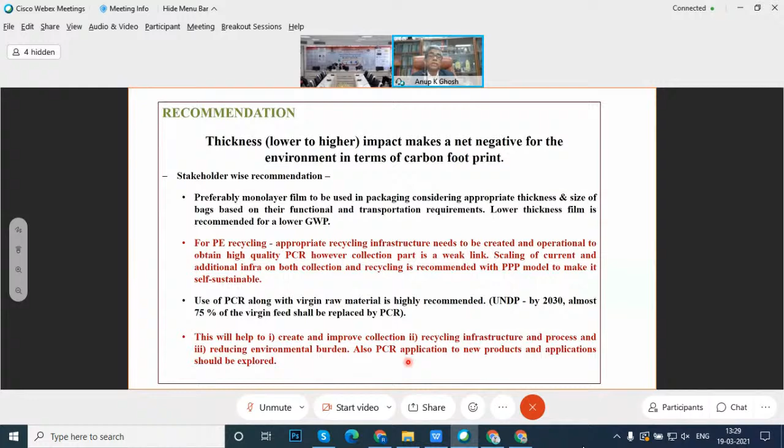And this should create an improved collection. This should have a recycling infrastructure and process development. This will reduce the environmental burden, and this PCR application to new products and new applications should be explored. So this is generally done.

So I end my talk by giving you a little idea about that. We should have what I call life cycle thinking. We should think that way. And this is what life cycle thinking is asking: that we must be defining recyclability. We must be establishing a recyclable hierarchy. Rather than just saying this will go to lami tube or this, we should have a hierarchy of which goes where. HDPE is better recyclable, and that's why the companies are introducing this.

What is the effect on recyclability due to the presence of similar or non-similar material? We should look into it. What should the policy be for material reduction? I explained to you. Is it in terms of thickness versus collection versus recyclability from waste? Shall we use synthetic versus biodegradable material? Then if it is a biodegradable material, what is the environmental benefit?

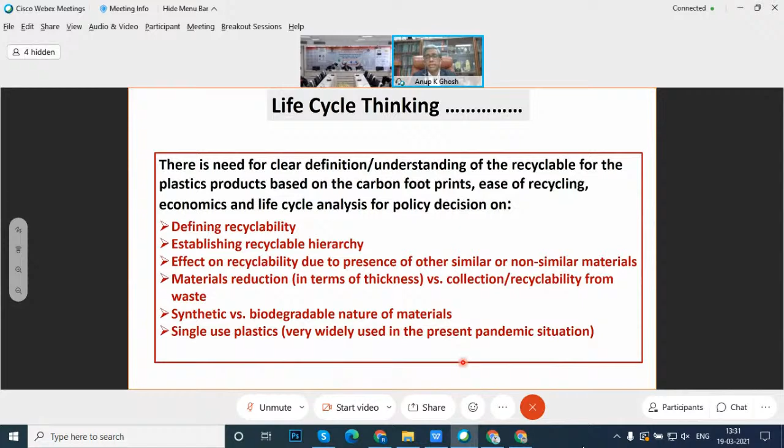Coming from the resource to the material, single-use plastic has to be evaluated. Although single-use plastic was a savior and widely used in the present pandemic situation. I have been involved in a few product developments, and I can see for our healthcare workers and everybody, even for digital packaging and marketing, single-use plastic became very useful for this purpose.

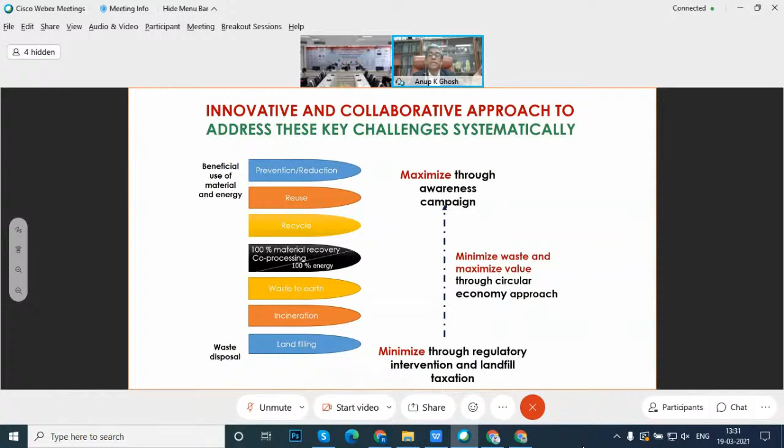So what I request is that we minimize through regulatory intervention and landfill taxation, and maximize through awareness campaigns, so we can reach beneficial use of material and energy. We should reduce landfilling as much as possible, and move towards the hierarchy I showed before.

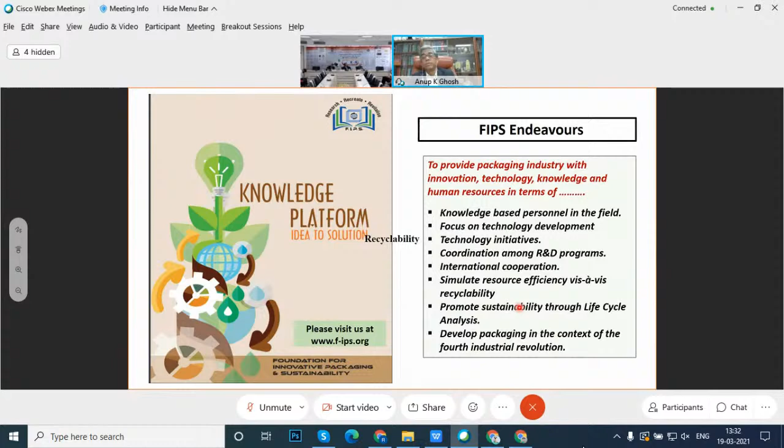I'd like to end by saying that we are now part of a knowledge platform, which is a foundation for innovative packaging and sustainability. We have our website where we take care of a lot of knowledge-based development, technology initiatives, coordination among R&D programs, international cooperation, stimulating resource efficiency and recyclability, life cycle analysis, and how to use this fourth industrial revolution, Industry 4.0, in packaging and all that.

I'd like to end my talk thanking you. A lot of the analysis I gave a preview of was from organizations involved and providing funding for the project, which has given a lot of value to our talk. Thank you very much.

Thank you, sir. Many thanks, sir, for the deep information shared with us. In fact, many of us were not aware of it.

So much deep information is required on this subject, and you started with the very basics and ended with the commercial implications of recyclability, and also the policy involved worldwide, carbon footprint, and new technology in single polymers to be used for different polymeric applications. You also showed many examples of smaller plastic items, flexible packaging, plastic bags, beverage bottles, and the implications on recyclability. You also shared information on multi-material to mono-material.

Neopack is a new material which has been introduced in the market, and companies are getting benefit out of it. Different companies like Hindustan Unilever, Colgate, L'Oreal, and Procter and Gamble have started running this polymeric application in recyclable packaging materials, and how much benefit the world will be getting out of it.